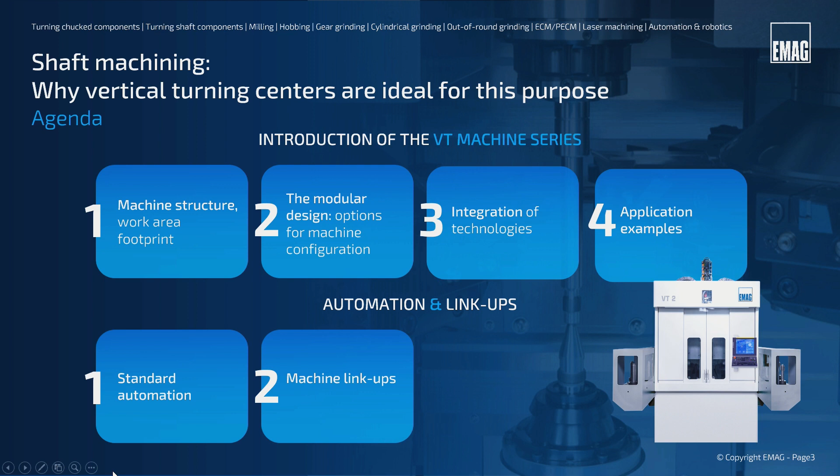Let's get started. You basically know two machining strategies of turning shafts: horizontal-wise or vertical-wise. EMAG clearly opted for the vertical turning strategy. From our point of view, it's the best and most suitable machine concept for our customers. In the next 45 minutes, we would like to show you the advantages in using a vertical turning center from our VT series. In the beginning, Andreas Droffel will give you an insight to the machine technology and its wide range of applications. In the second part, I will show you how versatile and efficiently these machines can be linked together. Now, I will give the floor to Andreas Droffel.

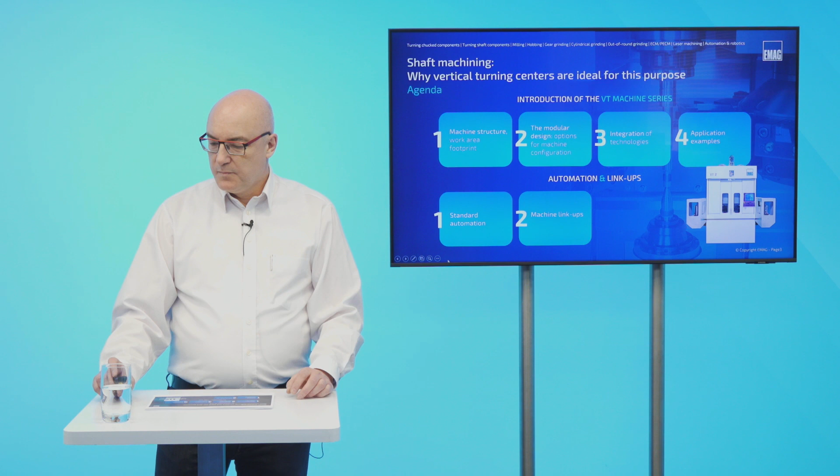Thank you very much, so welcome. What I want to show you first is the machine structure, the working area of the machines, and the footprint of the machines. The VT machine is a construction kit, so in the second point we want to have a look at the modular design of the machines and the options for configuration. Integration of technologies is point 3, and at last we will have some application examples.

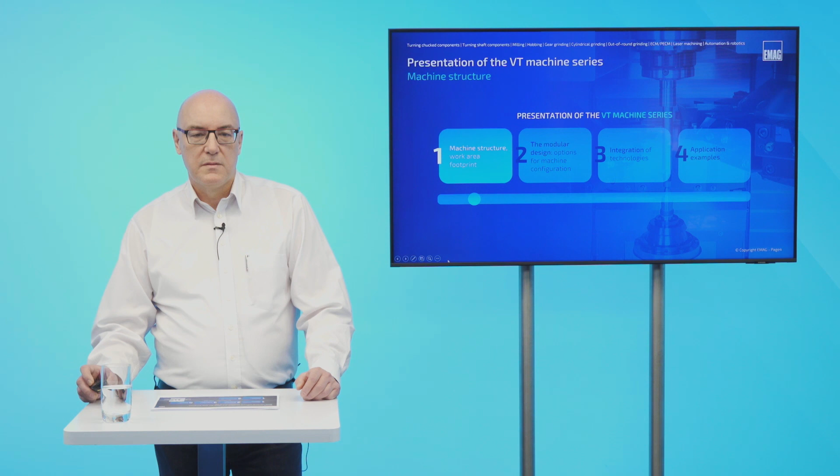So first of all, the machine structure. Here you see our main body of cast granite. The main spindle is implemented. The main spindle is movable in the vertical axis. The cable chain, the tailstock on the lower side is fixed. Some housings.

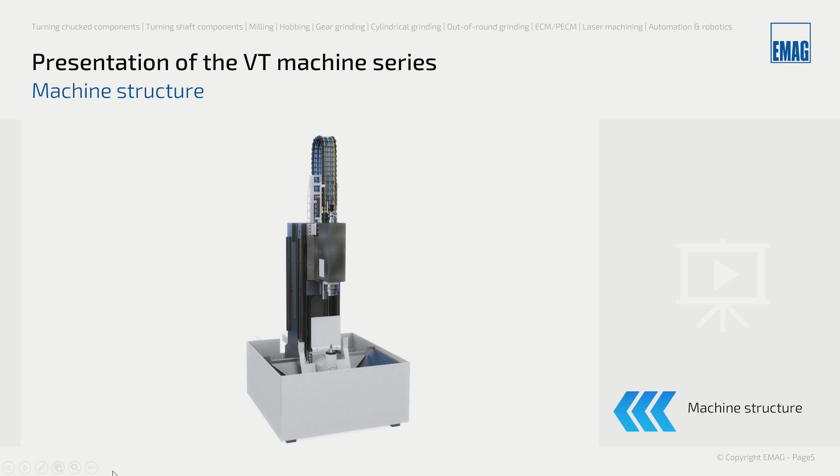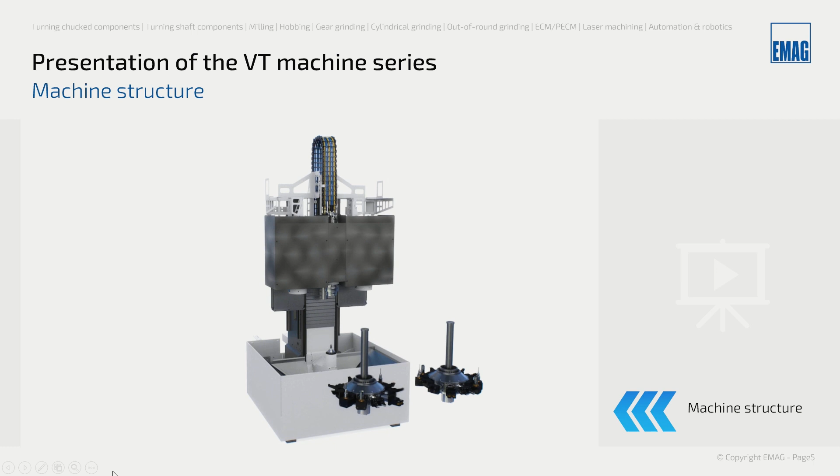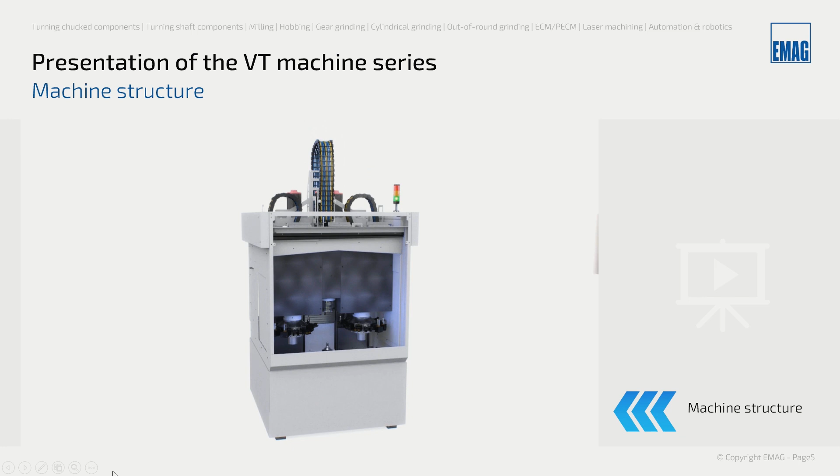The turrets on the left and the right side. Cable chains, our standard automation on the left and the right side. And you see the working area is good reachable for changing tools or something else. We have our energy compartment in the back and the swarf conveyor.

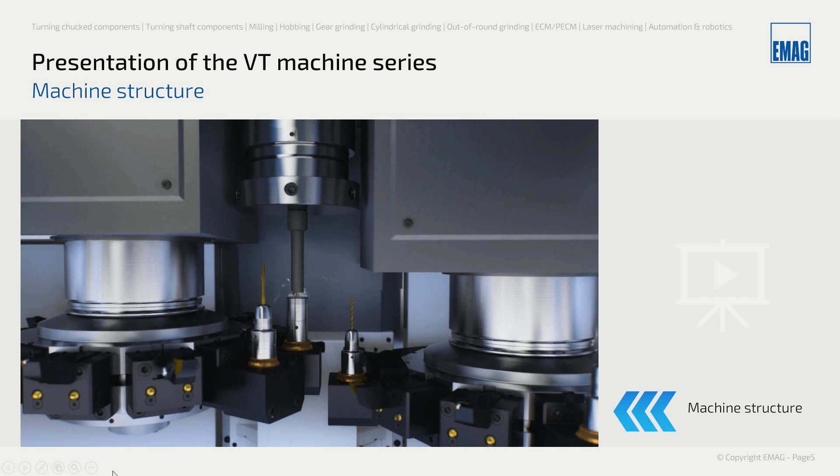Now we see the first example, it's an injector body. The left turret with a gripper is loading the part. We're doing the end finishing of this part with special tools, centering and length, drilling operations. Now we support with the tailstock and do the rough turning with 4 axes. And finish the part.

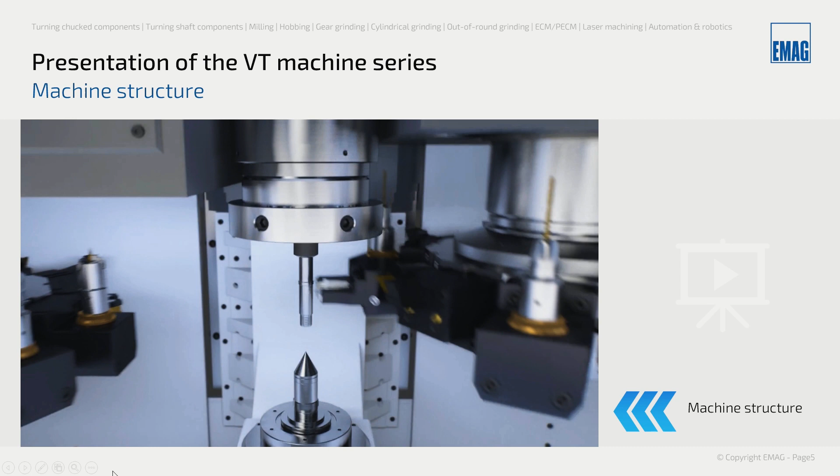Now a tangential rolling head will do the thread. And after this, the right turret with a gripper will unload the part to the right side automation.

So have a look at the working area of the machine. On the right side, you see our common configuration. It's a spindle on the upper side, as I said, it's movable. We have a tailstock on the downside. In the background you can see the steady rest, and on the left and right side are our turrets for the tools.

We build the machine in two sizes. First is a smaller one, the VT2 or VT100, for workpieces up to 100 millimeters in diameter, and the bigger machine, the VT4 or VT200, up to 200 millimeters in diameter. The VT2 and VT4 are machines with a FANUC control unit, and the VT100 or VT200 is with a Siemens control unit.

We build the machines for 160 or 250 millimeters chuck diameter, so the smaller one 160, the bigger one 250, and maximum part diameter, as I said before, 100 or 200 millimeters. Part length is 400 millimeters or 630 millimeters. And the gripper on both turrets is up to 100 millimeters in diameter, or 125 millimeters in diameter for the bigger machine.

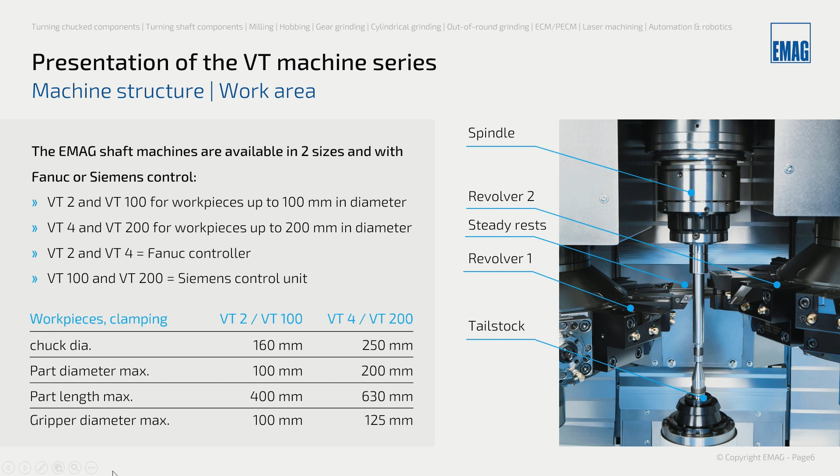The footprint of the machine, here an example of VT2 or VT100, including automation and chip conveyor. The depth is 5.1 meters. For the bigger machine, the VT4, it's 5.6 meters. The width is 2.4 meters for the smaller machine, and for the bigger machine it's 3 meters. In height, we use 2.55 meters for the smaller machine, with a cable chain 3.4 meters. And the VT4, the bigger machine, around 2.9 meters, or with a cable chain we need 4 meters.

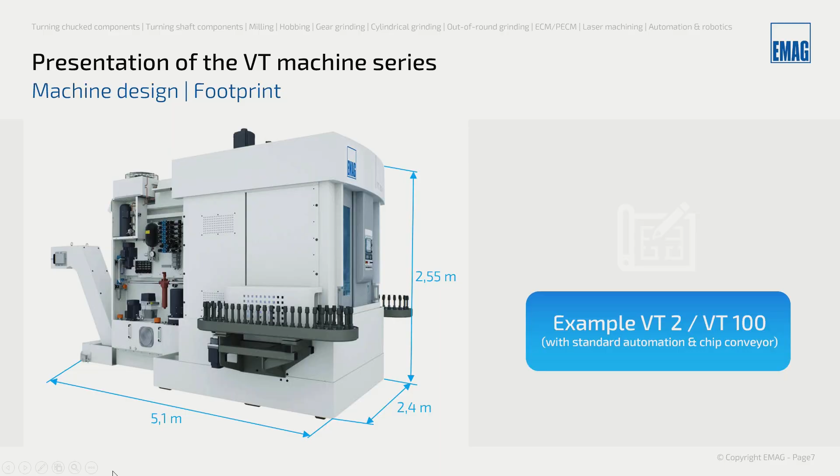So the modular design of the machine - let's look at the different solutions, how you can configure the machine. We count the rows or tracks 1, 2, 3 from the left to the right. Track 1 and 3 are for our turrets. And in the middle, track 2 is for spindle, tailstock, what we need.

And we equip the turrets on the left and right side with a BMT55 interface for the smaller machine, or 65 for the bigger machine. Each turret has 11 positions for tools and 1 additional position for the gripper. It's also possible to use the turrets with VDI 30 or VDI 40.

We can equip all turrets with driven tools and also with a Y-axis. In the middle, you see the spindle on the upper side and the tailstock on the downside. It's also possible to use 2 spindles in the machine instead of the tailstock, and then we can do op 10 and 20 at the same time in both spindles, and each turret can reach each spindle as you want.

Andreas, may I disturb you? We got the first customer questions. What is the center distance of the machine, and what spindle power is possible?

The center distance of the smaller machine is 750 millimeters. For the VT4, VT200 it's roundabout 800 millimeters, a little bit more, but we have options to get it a little bit higher. The spindle power for the smaller machine is up to 27 kilowatt, and 38 kilowatt for the bigger machine. But we have different spindles for using in these machines, so if we need more power or less power, we have different options.

However, we have two exceptions. There is also a machine called VTC200 CD. CD means it's a center drive machine. There we have only a center drive in the middle, and there's no steady rest in the machine. The other exception is the VTC200EE, which is a machine for end finishing. EE, because we have two turrets with driven tools for end machining, and each turret has 5 rotating spindles with HSK63 interface for rotating tools. In the middle on track 2 we use a movable clamping device with 2 adjustable clamping rows for different tool lengths.

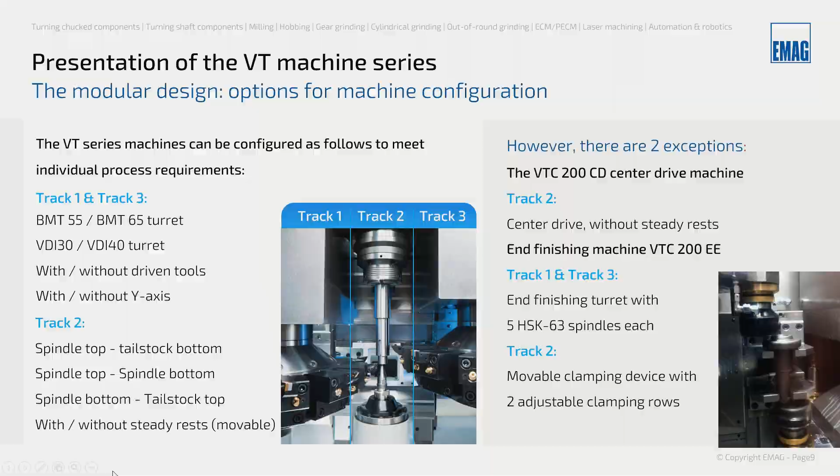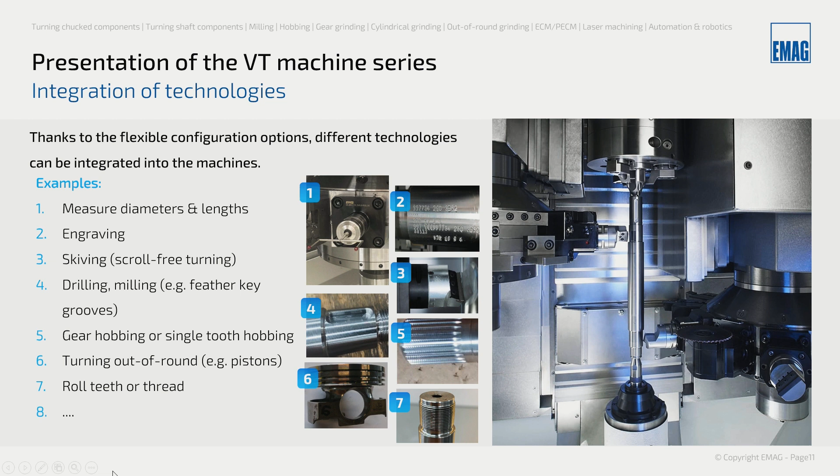Andreas, again, may I disturb you? Interesting question: how long does an average tool change take?

An average tool change depends on the people who do it, that's the first point mostly. Second is the interface, is it a Capto, or do you only change the inserts? But on average we calculate roundabout 2.5 minutes for the first tool after stopping the machine, and for each additional tool we calculate 1.5 minutes. Okay, good, thank you. You're welcome.

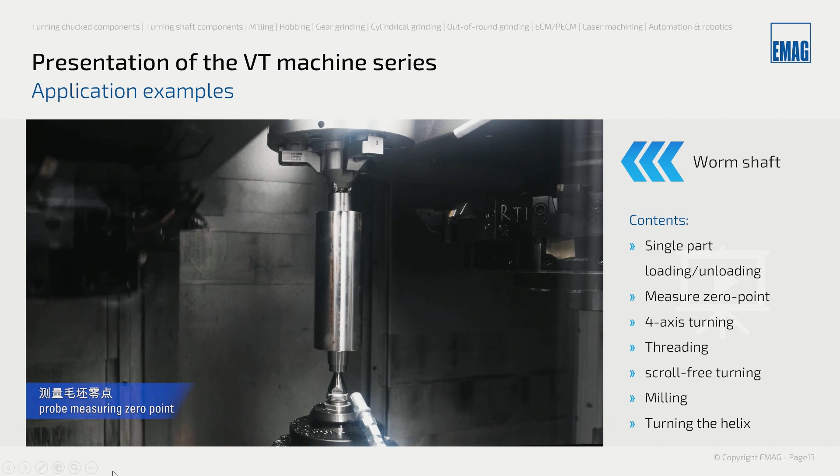Now we have some examples from real life. First of all, we load the part with a gripper on the left turret. In this example, we're doing the measuring of the 0 point. Now 4-axis rough cutting with a face driver in a special shaft clamping device with retractable jaws.

Now we move the jaws forward for better torque and do the rough cutting with 4-axis on the bigger diameter. Now rough cutting 4-axis on the lower side. Finishing.

We retract the jaws to get better run out. We finish the part, and while we finish the area for the helix, what comes later, the left turret is at the start point for its next operation.

The right turret will finish, the left turret starts, the right turret changes tool and does the thread turning, and the left turret has a skiving tool on start and skives. Now we go down with the jaws and do the milling.

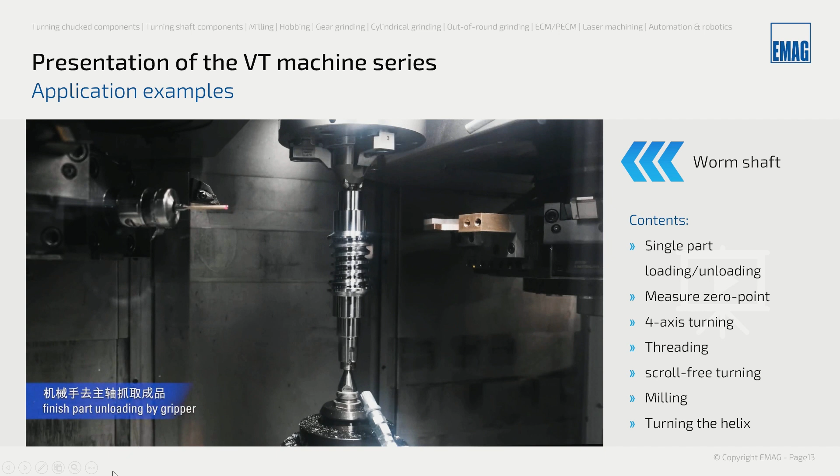Next example is soft skiving. Normally with small seats where the length is not too high, we only use a Y-axis, but for longer seats we have to use a Z-axis in addition to the Y-axis. It's not scroll-free, but you see it's very fast and you have a very good surface.

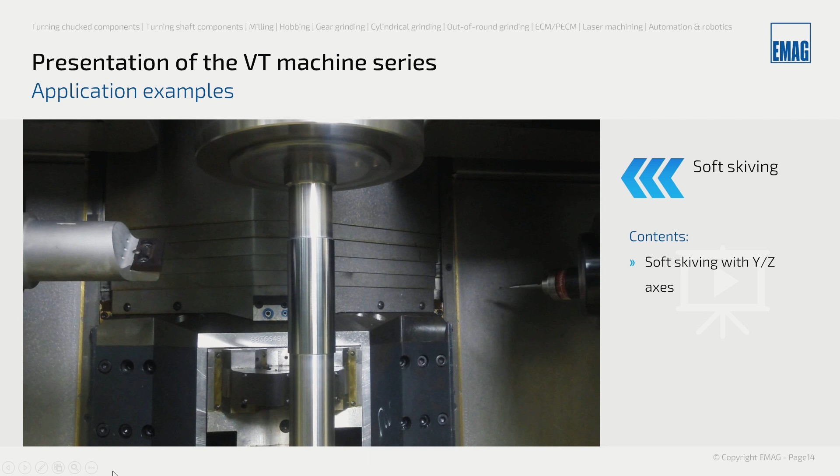Also an example with skiving is a rotor package. Doing the upper chamfer, and after it we do the rough turning with prime turning using 4 axes. For short cycle time and a very good surface, we use the skiving operation to finish the outer diameter.

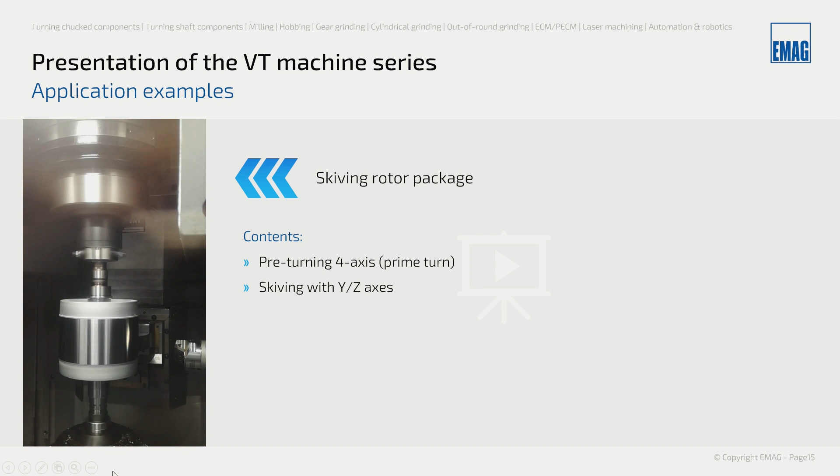Here we have an example for loading and unloading through the machine from the right to the left. We talked about loading through the machines simultaneously with 2 turrets. We can do it from the left to the right, from the right to the left, but we are also able to load and unload only on one side.

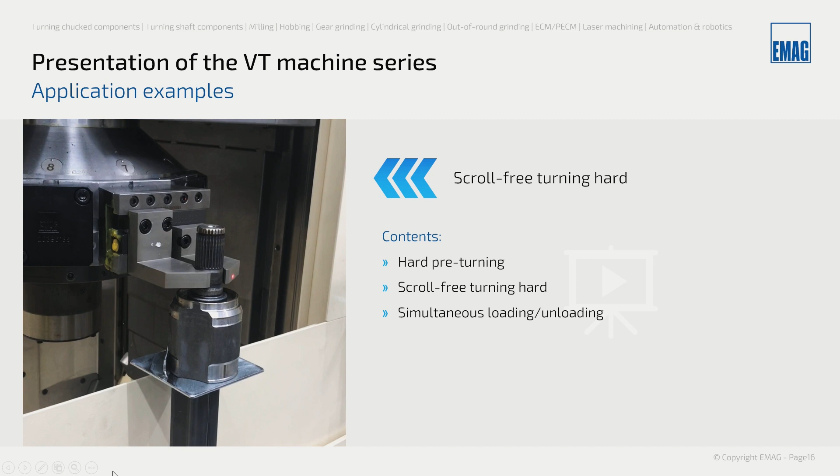Here we have an example from right to left. The right turret will load the part into the spindle. You see the left turret unloading.

Clamp between centers. The left turret will conventionally finish one seat and pre-turn for the skiving operation. This is hard turning. Left turret is unloading. Right turret gets the next part in the machine. And we start from the beginning.

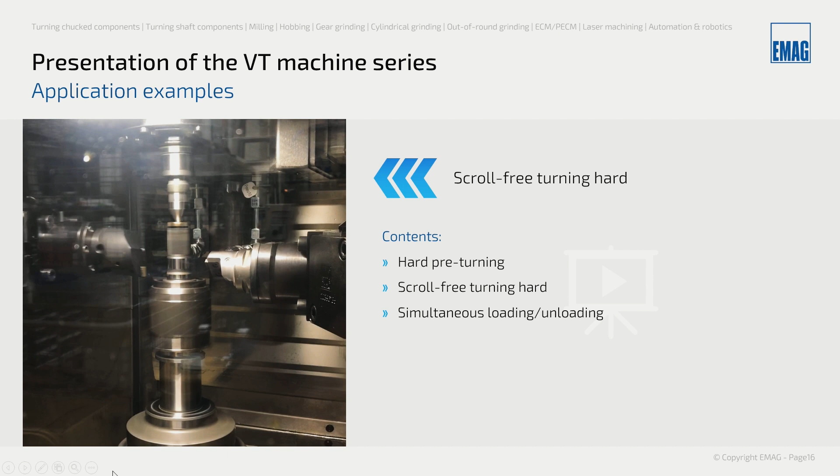Finishing conventional, pre-turning, and hard turning, scroll-free, and unload the part with the left turret.

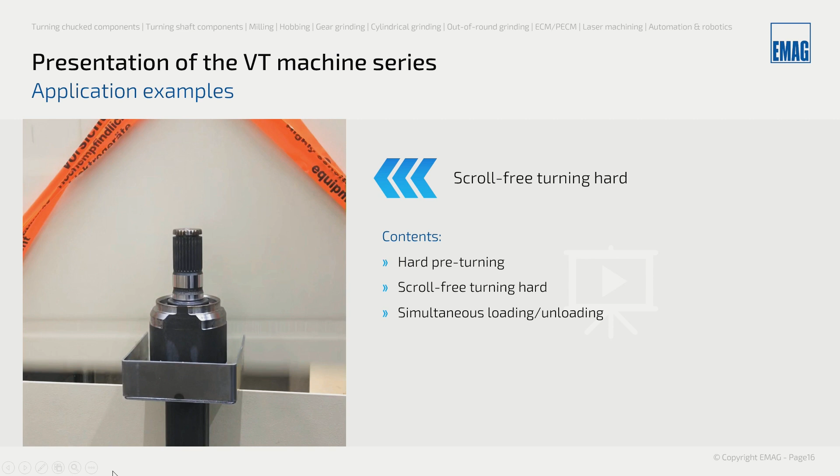Okay Andreas, again we have 2 questions from our visitors. What is the advantage of the spindle on the downside, and later a different question: what is the quality we can achieve with a hobbing tool?

Okay, advantage of spindle on the downside. What you see later when Alexander does his presentation is the possibility to get more than one machine, or 2 machines in a row, and there can be an advantage to have a spindle on the downside for the op10, without swiveling the part 180 degrees.

We can load into the next machine. Sometimes for automation it's better to use a spindle on the downside, because of the radial orientation or the weight of the part when it goes on the conveyor. The weight has to be on the lower side, not on the bottom of the part, on the upper side, sorry.

So it's a purpose of handling the workpiece. Yeah, handling is sometimes more easy. And because of this, we have these different options.

The quality while hobbing is roughly IT9, and we do it up to module 2. Yes. Securely we say IT9, but in reality we have it better, we have it better in IT8. Thank you. You're welcome.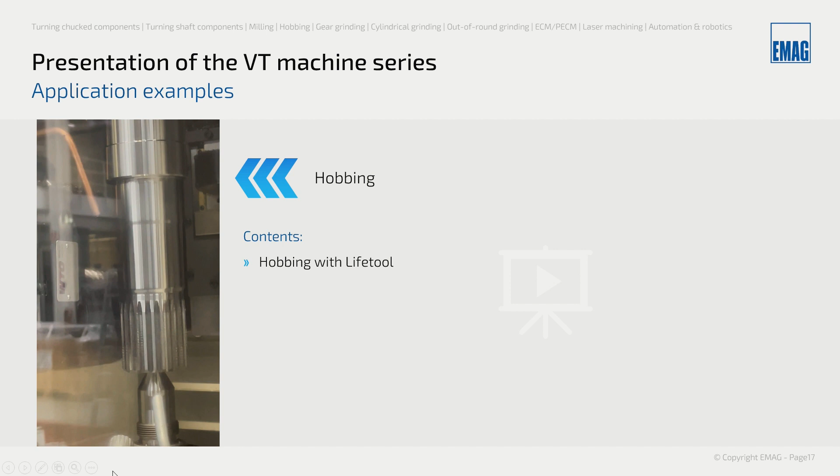My last example is end machining with a special gripper. You see on the right turret a special gripper for loading the parts. That's a short raw part. And with the part in this loading gripper, the left turret with its live tool will mill the lower end and center the lower end.

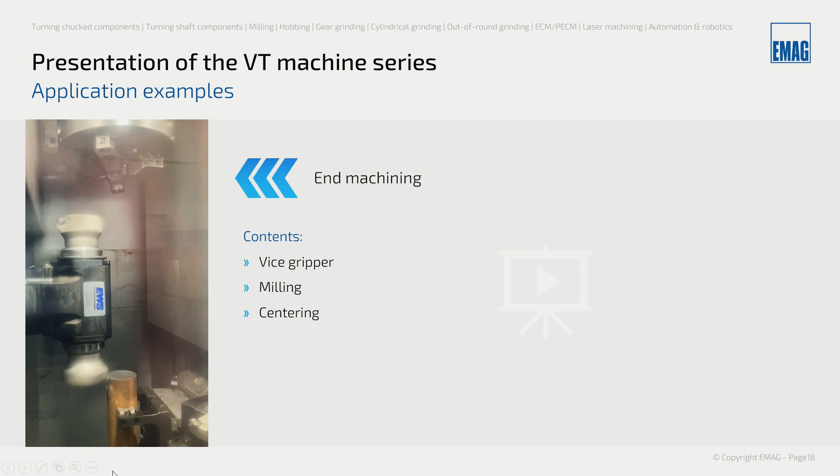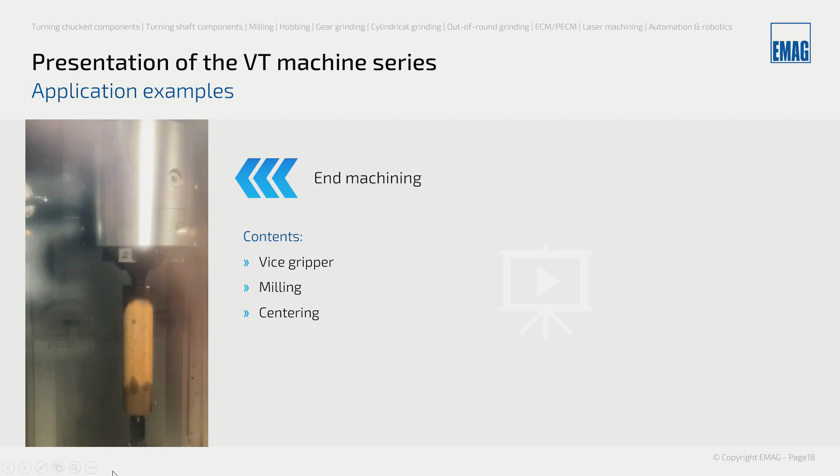After this we go down, and the live tool will finish the length with a milling cut and centering on the upper side. After this, we are ready to clamp the part between centers and start the turning operation. And that's it from my side. Now I want to give back to Alexander.

Thank you, Andreas, for the technical insights of our VT machines. Let's move to automation and interlinking. First I will show you some standard features to increase the efficiency of the machine. Later I will show you some success stories, from the small and compact production cell up to a really big production line.

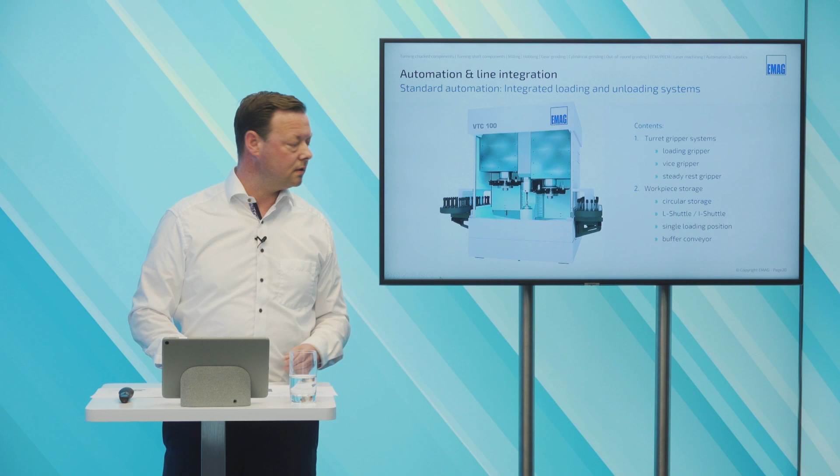A view from the front: the biggest advantage we have in standard configuration is the simultaneous loading and unloading of workpieces. The left turret grips a part from the circular storage raw part, and the right turret unloads the workpiece and puts it on the finished conveyor. This saves a lot of time when both turrets are working at the same time. This is the standard configuration.

In this state, the VTC machine, or the VT itself, is a standalone machine. You do not need any safety fence or any additional securements.

So let us go to the integrated loading and unloading systems. These are the first turret gripper systems, part of which you have seen in videos from Andreas. First of all, the loading gripper. It can be equipped with rigid or pendular jaws, depending on whether you have a raw forging contour or a pre-machined workpiece, or you can have different inserts, different material, to protect sensitive surfaces from clamping marks.

In the middle you have the vice gripper. You've already seen it for end machining, cutting to length, centering, and then you can immediately turn between the centers. On the right-hand side we have the steady rest gripper.

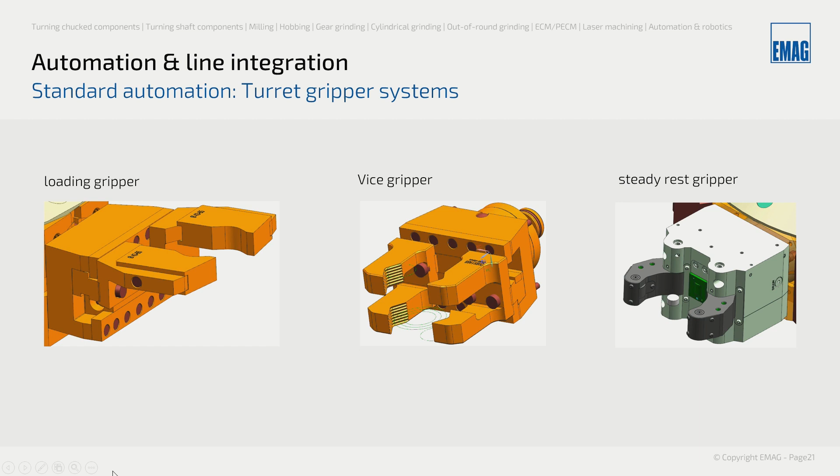Sometimes you have lack of space in the working area, maybe because you have protruding or long tools in the turrets, so a fixed steady rest is not suitable. We have here a helpful solution. Those three are the most common gripper systems. Beside them we have a variety of special purpose grippers, but these are the common ones.

For the workpiece storage there are different options. On the left side, the circular storage, and the second one, we can adapt an L or I shuttle for different automation processes, and the single loading position, point number 3, the dot you see. On the right side there will be a handling unit installed.

Number 4: if we have hard-linked operations, OP10, 20, 30, or even more, we can install buffer conveyors. You may need them if you have different cycle times of the machines, or to reduce downtimes. So when one machine is being set up with new tools, the other machines can fill the buffers.

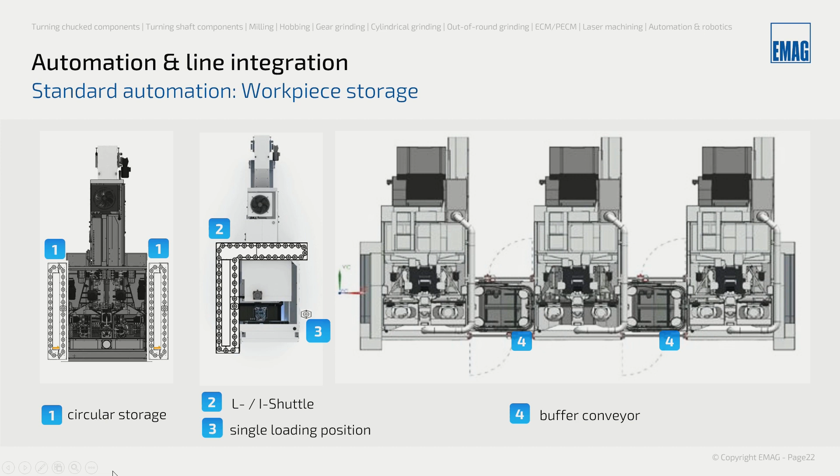Some more additional options outside of the machine. I'll show you a short video.

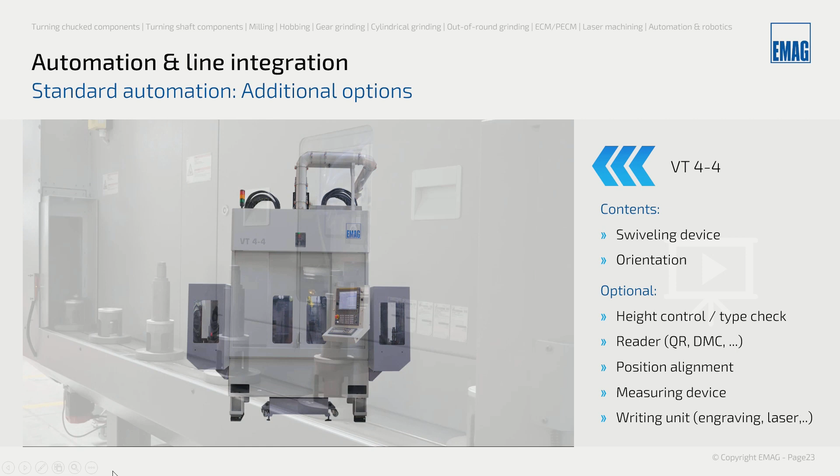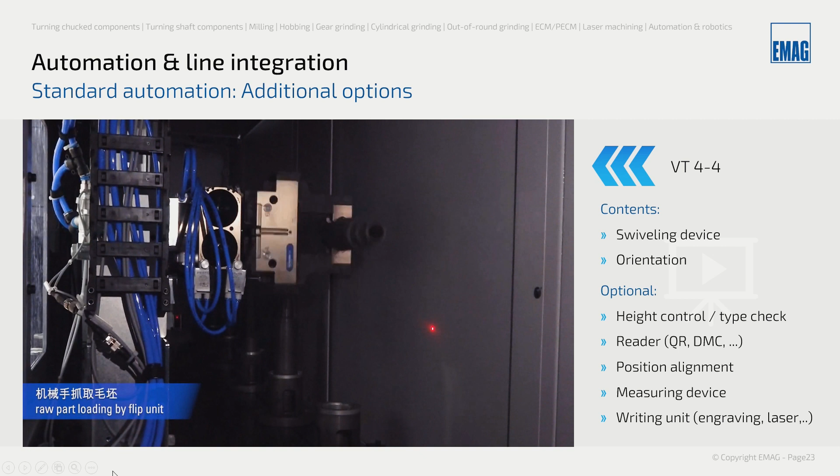For example, here you see some shafts with the inner spline. Outside on the storage conveyor, we have the pallets with the spline, so they are orientated, and the swivel unit brings it to the machine.

Now you see why we need it in this way. The mandrel from the upper side meets the spline of the workpiece on the first touch, so no searching is needed.

Some more options are height control on the raw side, or type checks if you have several batches of family type workpieces, so to be secured that you do not load the wrong raw parts.

Then possible are readers, QR, DMC readers, active position alignments, and on the finished side, some additional measuring devices, or even writing units.

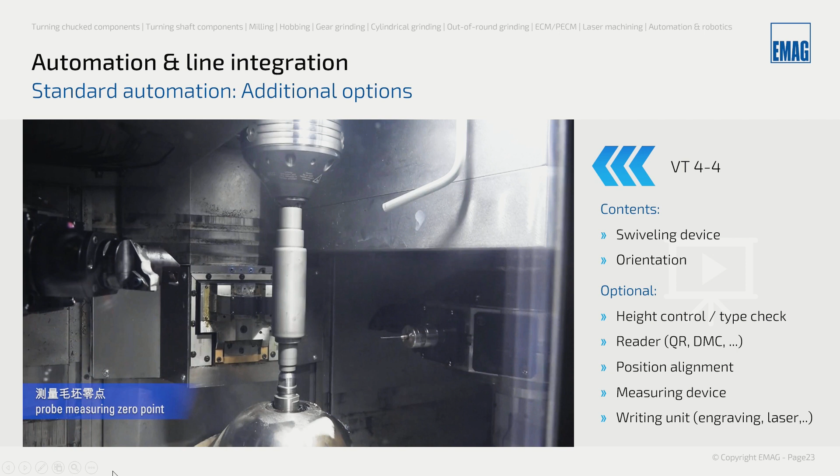I got a question right now. How many workpieces fit on the standard automation? I think that is a question for me.

In the standard circular storage system, you can load 27 workpieces on each side. It depends on the maximum weight.

So you have to decide how many workpieces is possible, either 27 workpieces or maximum load.

So now I will change to some machine link-ups, some success stories I want to show you. Start at the small production cell.

Here we see a VT200. On the right side, left side, we have a stacking cell, our EMAG stacking cell, SCS4, linked with a robot.

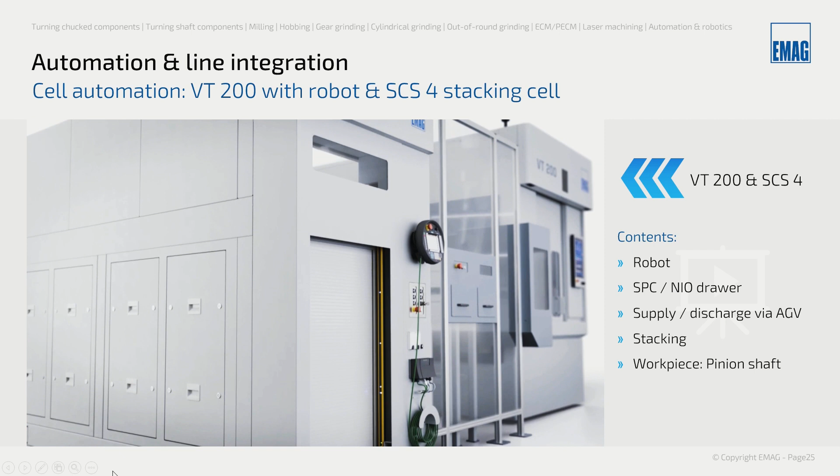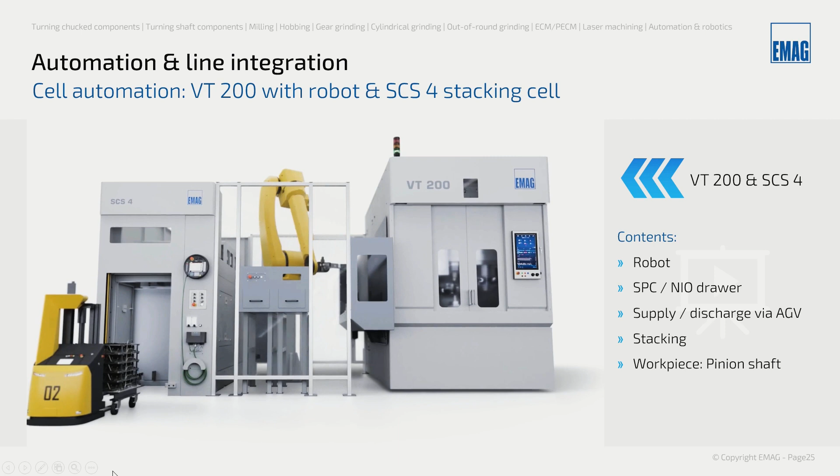The loading strategy of this machine is only on one side. In this case, the left one, the cycle time of the machine allows a left-left change, raw and finished parts out of the machine. On the other hand, it is a very compact design, so we do not need additional space on the right side.

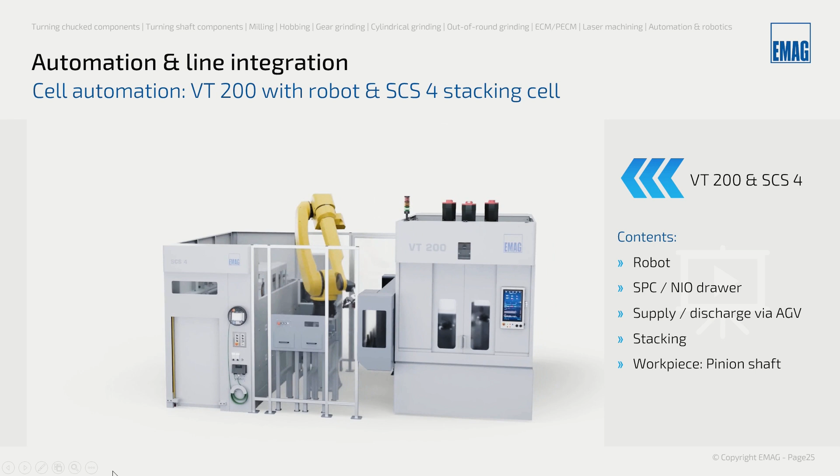The stacking cell is loaded by an AGV, stacking, and the SPC NIO drawer you have seen.

The next strategy is the L shuttle I showed you, combined with the single loading position of the right machine, VT100.

Here we have it combined with a grinding machine, a G160 from EMAG. This is a hard turning and grinding setup.

The robot puts this workpiece on a single load position. The turret of the VT takes it, and end machining starts, it's hard turning with grooving, skiving for the bearings.

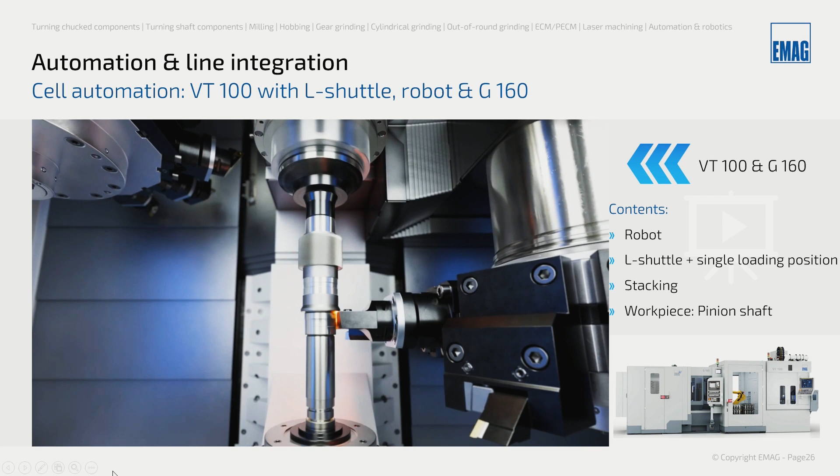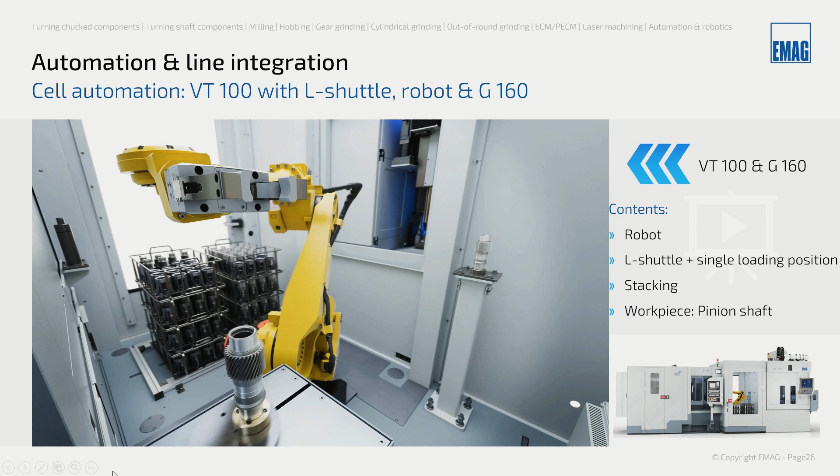This cycle time is so short that we have to change simultaneously left and right, and therefore we have the L shuttle installed. The robot takes the turned finished part and puts it for grinding in the G160.

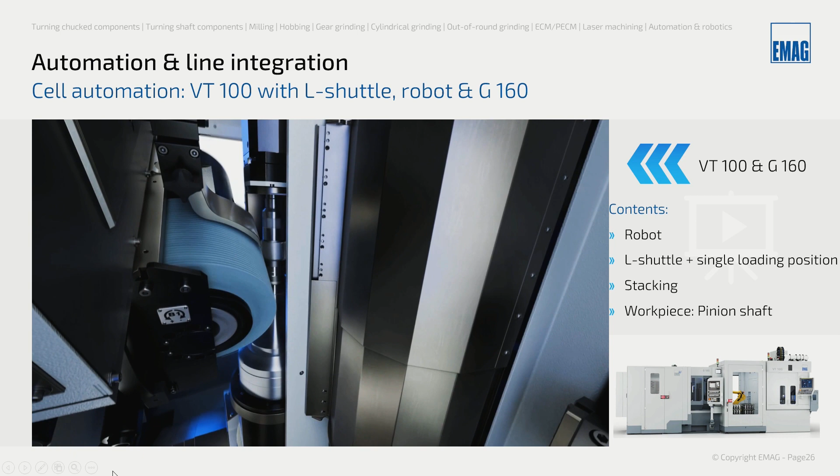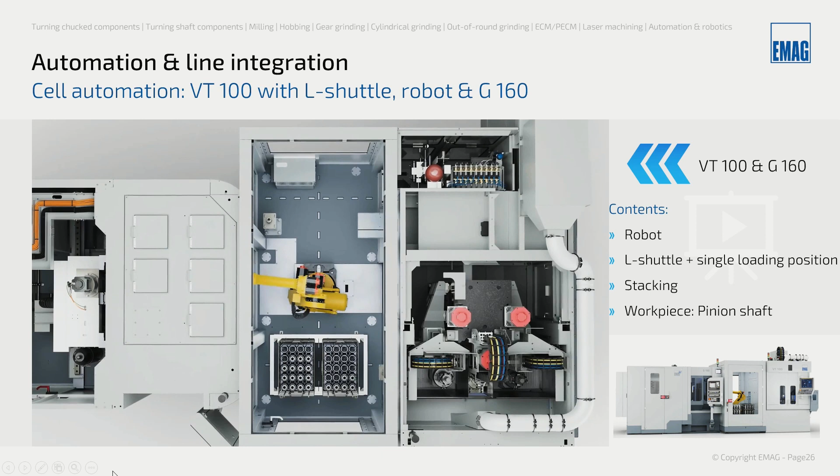Afterwards, it will be stacked in baskets. So this was the second strategy of loading, unloading and storage.

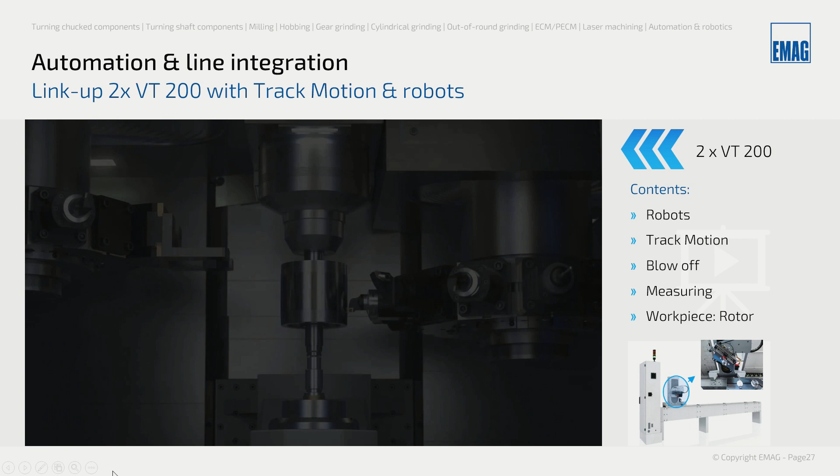And if the right rotor on the first machine has been finished and deloaded, then the track motion picks it up again.

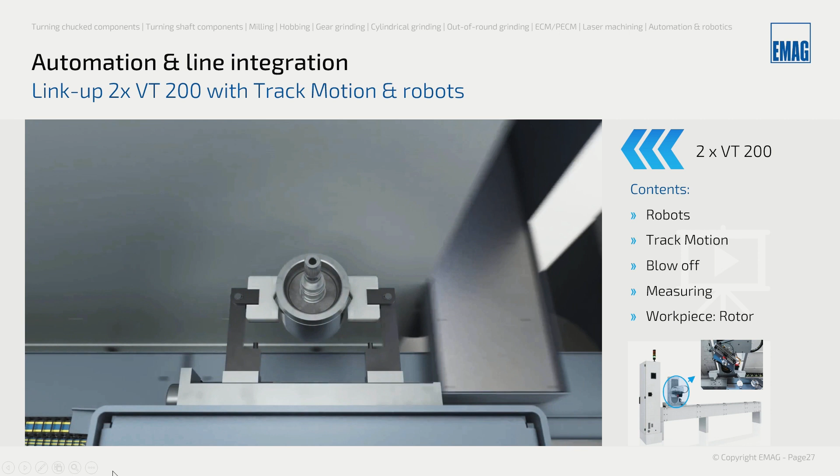It moves through a blow-off station and puts it into a measuring and writing device unit. Afterwards, track motion places it on the loading position for the customer robot to take off.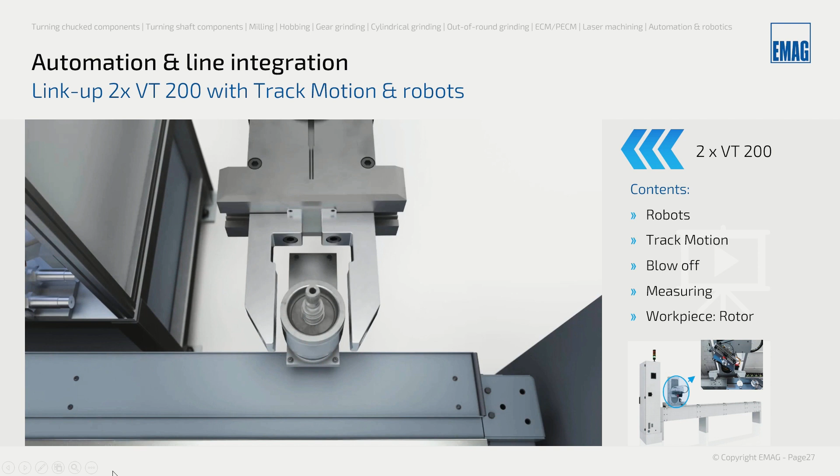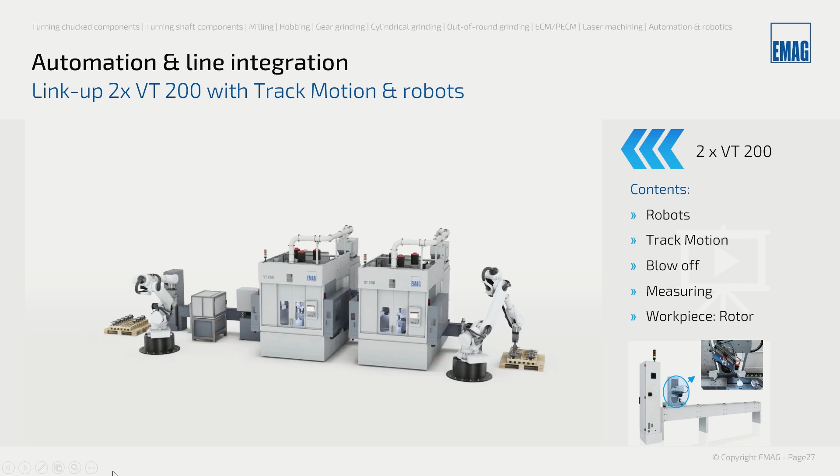Let us go even bigger. I had a question seen, I didn't want to answer it before we come to this page. It left, maybe it comes again. I got another in the meantime.

Why an L shuttle when one-sided loading is also possible? Andreas, may I ask you for answering?

Okay, yes, L shuttle is only an option to reduce the main time or cycle time of the parts. So loading through the machine is faster than loading and unloading on only one side.

But if you don't have this output of the machine, also you don't need this output, and the cycle time is not a problem, you can use the machine with one-sided loading and unloading.

If the cycle time is a point, we can go through the machine and put the part with the L-shuttle to the working area of the robot. So if you don't need it, you don't have to pay for it.

And one point for loading and unloading on one side may be the space of the machine, what we need in the plant.

And we need, I think, around about 300 millimeters for the L-shuttle on one side of the machine. If this is not possible, we can load and unload on one side. Perfect, so you got the point. It's a topic between having enough cycle time or enough space. We try to configure our machines and lines for the requirements our customers have.

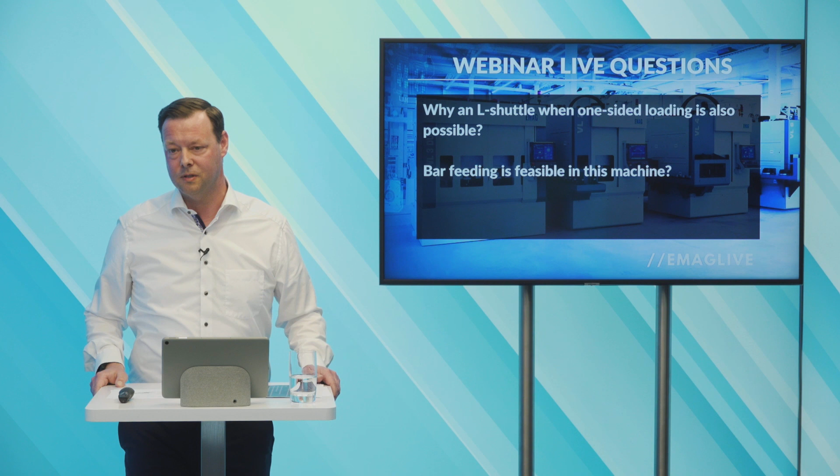First of all, we have a bar loader and a saw. The saw is the key. We have the shortened, sawed workpieces swiveled up, turned up in the vertical way. In point number 2, we give it to the track motion system. And now we start the standard way in vertical machining.

We have an OP10 roughing machine, we have an OP20 finishing machine. Then we go to the gear hobbing, even an EMAG machine, and track motion transports the workpiece onto a cleaning station where the robot cell is linked. The robot takes the workpiece, then measurement is made, labeling, and stacking in baskets in the end.

This success story has some interesting key facts. The length of the complete production line is 28 meters. The cycle time of the complete line is 90 seconds. So if you imagine handling 90 seconds in 28 meters, it is not possible to install a horizontal turning lathe.

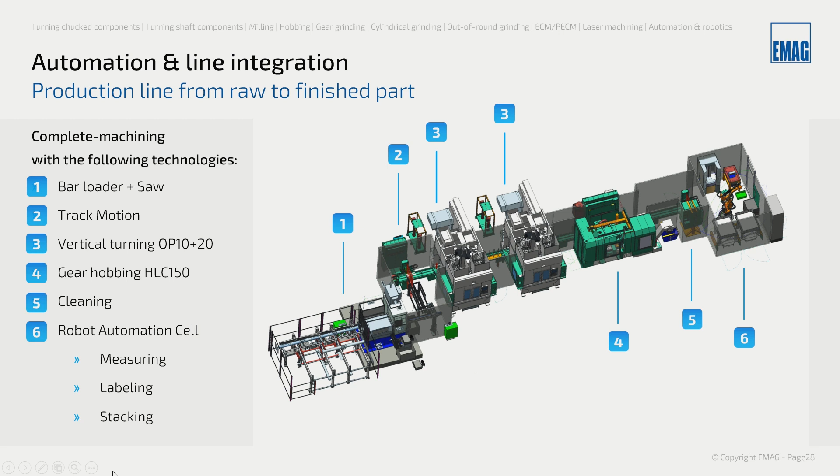How do we get to those complex solutions with our production lines? We are not relying only on our experience, we are using professional plant simulation software in this case. So in the offer phase, you give us your workpiece, raw and finished part, you give us your floor, your available space, and then we start calculating cycle time.

Then we make workpiece buffer design if necessary, if you need setup time optimization or standstill reduction. In the end you get the amount of spindles you need, and the output calculation is the result, where you can say at the end of the day, this is the amount of workpieces that I finish in my basket. This is what we rely on, because we work with real machine data, and these results are very good in the practical way in the end.

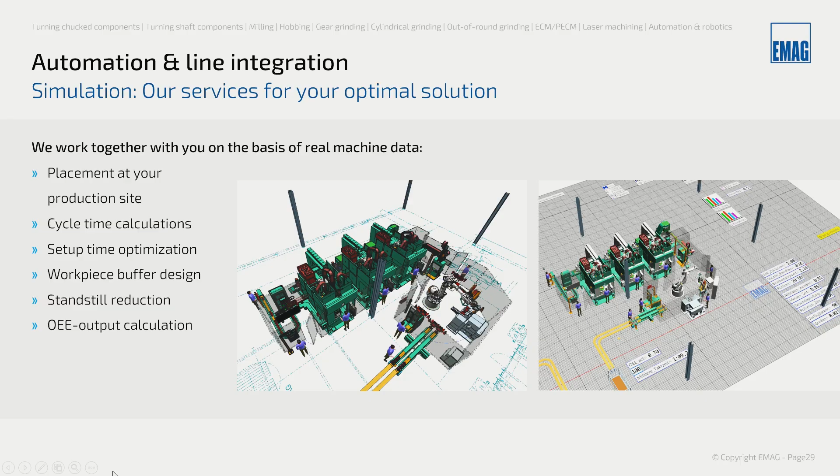So in the end, we had some technology topics of the machine, how it is been built up. We had some options for automation, loading and unloading. And in the end, I want to show you the advantages as a sum up.

First of all, we have an unhindered chip flow, the chips are falling down directly in the conveyor. We have short processing times, because we have 2 turrets which can make 4-axis machining. Then we have short non-productive or idle times due to simultaneous loading and unloading of the machine. We have ergonomic accessibility to the working area. We have favorable automation options.

For example, the circular storages are already included in the standard. We have a flexible automation capability, you can place a robot beside the machine without changing the design. Then we have a small footprint in width, as you saw in the last production line, so the concept can be realized in a vast space-saving manner. In the end, easy link up of several machines in a row is no problem with buffer conveyors, shuttles, or anything else.

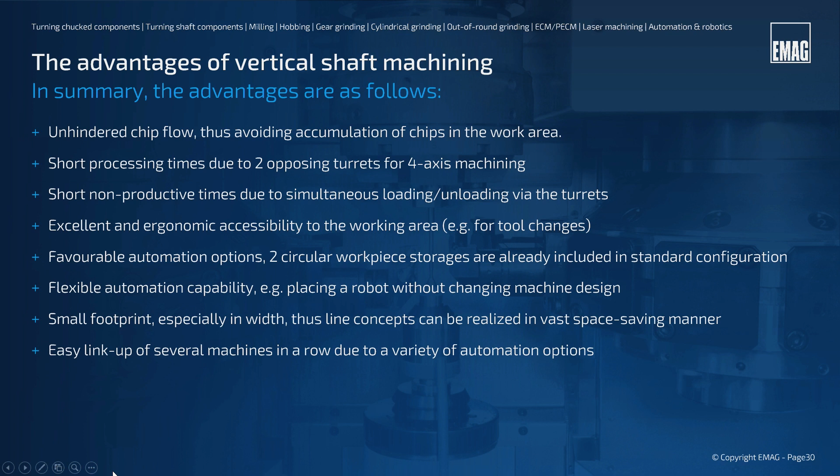So we are at the end of this webinar. I hope you got some imagination of what possibilities EMAG has, and which functions, options, and feasible points we can realize from your requirements.